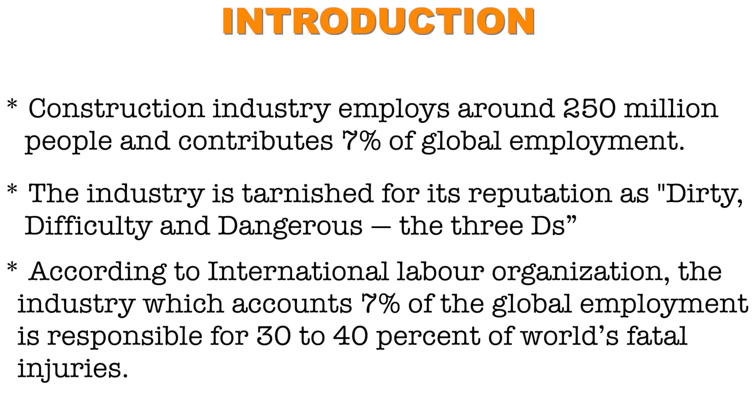The construction industry employs around 250 million people and contributes 7% of global employment. The industry is tarnished by its reputation as dirty, difficult and dangerous, the 3 Ds. According to the International Labour Organization, the industry, which accounts for 7% of global employment, is responsible for 30 to 40% of the world's fatal injuries.

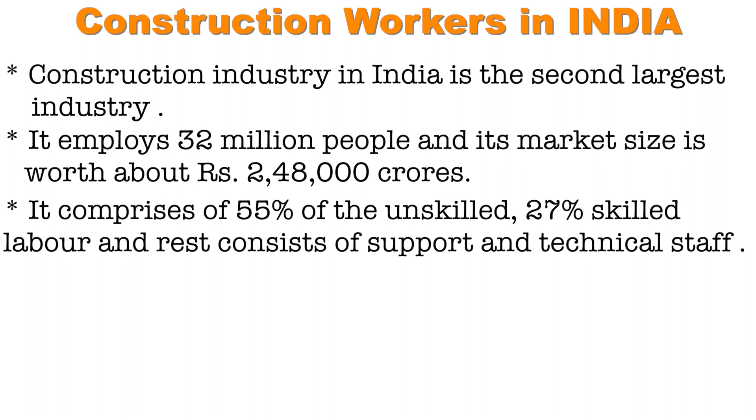Let us discuss construction workers in India. The construction industry in India is the second largest industry. It employs 32 million people and its market size is worth about rupees 2,48,000 crores. It comprises 55% unskilled labor, 27% skilled labor, and the rest consists of support and technical staff. The report from ILO 2009 revealed that every year nearly 50,000 Indians die from illness or work-related accidents. On average, 165 workers per 1,000 are injured.

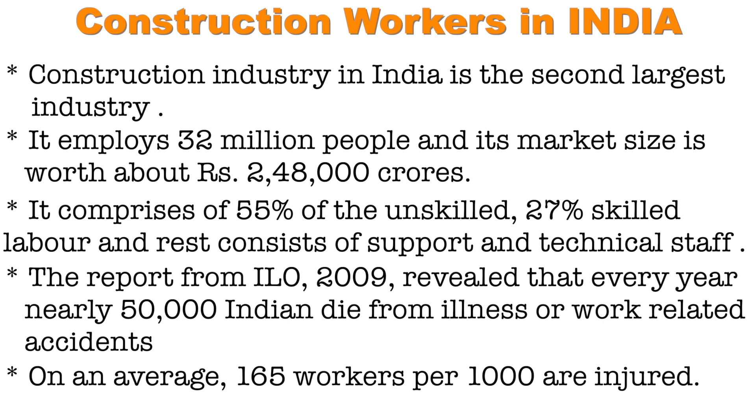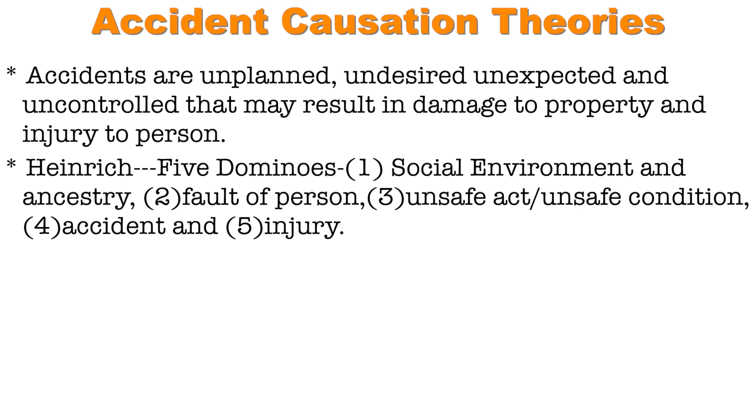Let us discuss accident causation theories. Accidents are unplanned, undesired, unexpected, and uncontrolled events that may result in damage to property and injury to persons. Heinrich's 5 dominoes: first, social environment; second, fault of person; third, unsafe act or unsafe condition; fourth, accident; and fifth, injury. Inherited traits: greed, recklessness, bad tempered, inconsiderate. Unsafe act or unsafe condition is the central factor.

Let us discuss unsafe conditions. What are the main unsafe conditions that occur in our industry? Rough, sharp or slippery work surfaces, defective equipment, overloaded tools and equipment, defective ladders and scaffolds, improper clothing, inadequate aisle space, inadequate ventilation, improper illumination, protruding ends of reinforcement and nails.

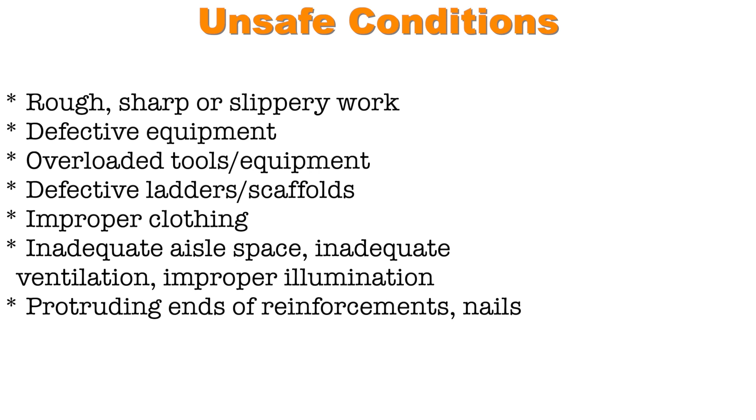Let us discuss the main points of unsafe acts. Not wearing a helmet or safety glasses, working while intoxicated, working with insufficient sleep, moving electrically energized or pressurized equipment, failure to use a safety belt, fall arrester and safety net. Using hands instead of hand tools.

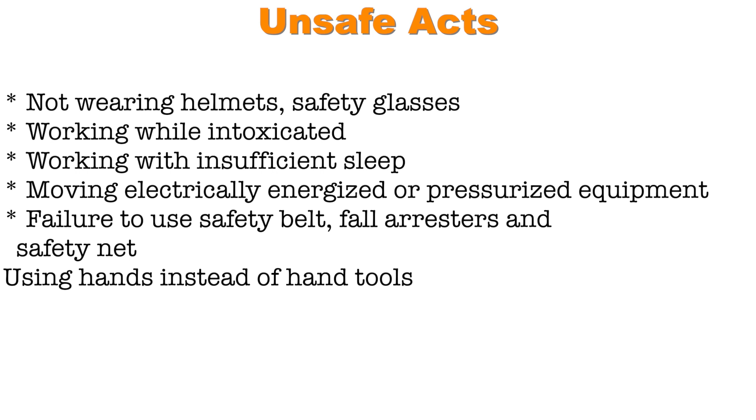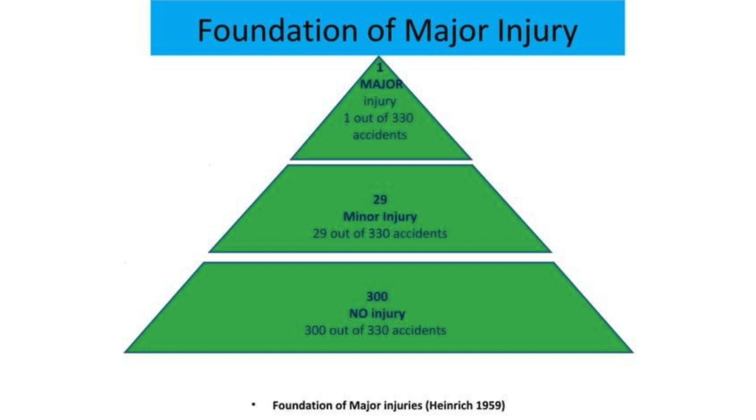Let us see the diagram. This diagram clearly shows major injury, minor injury and no injury conditions. Major injury is 1 out of 330 accidents, minor injury 29 out of 330 accidents, and no injury 300 out of 330 accidents. Look at another diagram.

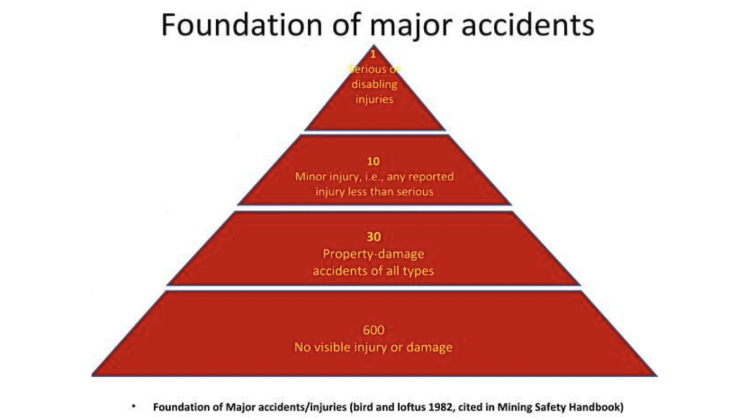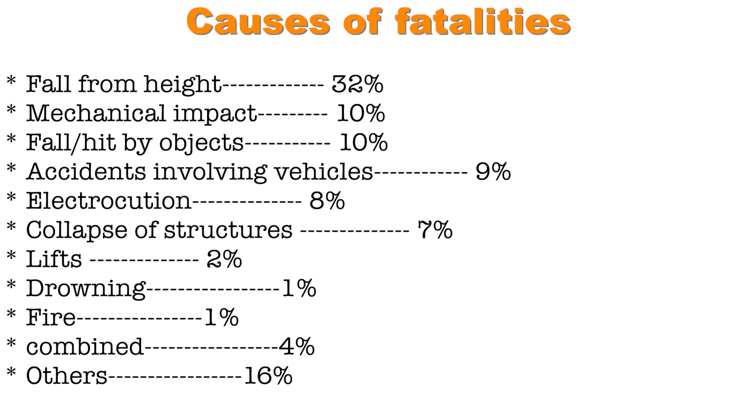Let us discuss implementing safety measures at construction sites. Construction is an industry filled with potential dangers. The good news is that you can minimize them by using appropriate safety measures. Here are 10 that could help you reduce accidents and keep people protected on the job. The first one is providing training before tool use or heavy equipment operation.

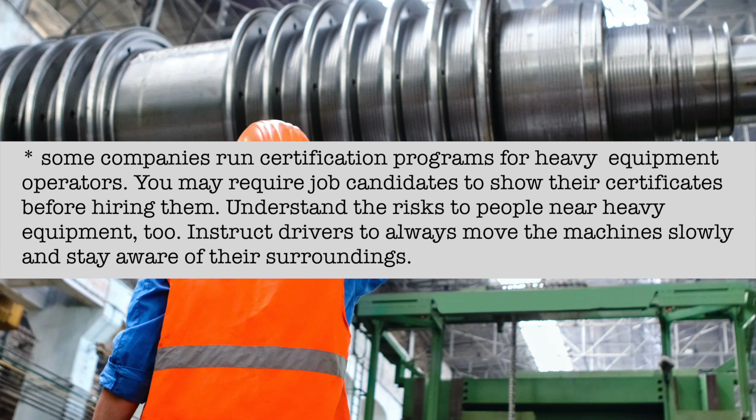Many pieces of equipment found on construction sites are especially dangerous if people don't know how to use them. Never assume that workers understand how to handle the tools and equipment provided. Give them training to ensure that they do, and update educational material so that it reflects current procedures. Some companies run certification programs for heavy equipment operation. You may require job candidates to show their certificates before hiring them.

Understand the risk to people near heavy equipment and instruct drivers to always move the machine slowly and stay aware of their surroundings. The second main point is to assess each site to identify and minimize dangers. All construction sites have risks, but they are not universal across locations. For example, someone working at height faces different threats than someone working with electricity. Take the time to evaluate each site and look for all dangerous areas. Determine the best way to minimize risk.

That may mean investing in new fall protection or installing railings to help people walk safely across slippery surfaces. Checking out each site before work begins is not sufficient. You must also monitor and limit hazards throughout a project timeline. The third main point is to require every worker to wear PPE, that is, personal protective equipment. Protective equipment for construction workers ranges from steel toe footwear to high visibility vests.

Clarify your minimum requirement for the gear a person must have before coming to work so that there are no uncertainties. Inspect protective equipment for continued proper functionality, as it may not serve its purpose if the item becomes overly worn. For example, a broken snap or strap on a hard hat could cause it to fall off if the person sustains a blow.

The fourth main point is implement practices of safe site visits. It is also wise to enforce safety measures for site visitors. Perhaps a client wants to check the progress of a new building, or a team leader at a certain company needs to see the work site before agreeing to provide service for the project. You could make every person sign in on arrival and only move around the area while accompanied by an authorized person.

Another smart thing to do is decide that all visitors must have approval before coming, as the COVID-19 pandemic makes it crucial to maintain safe distance. Virtual visit software has become popular for letting people see construction zones remotely.

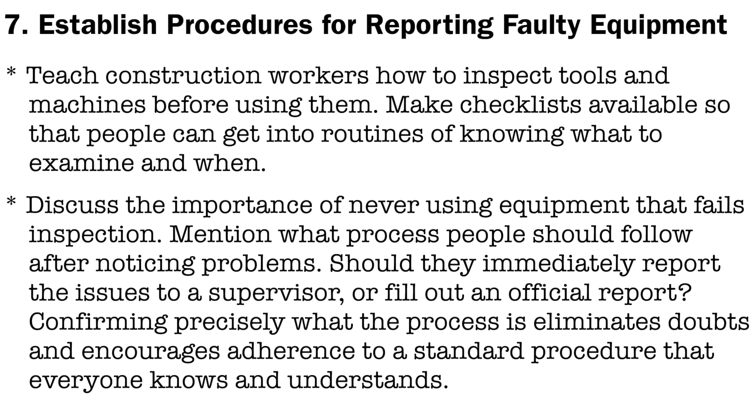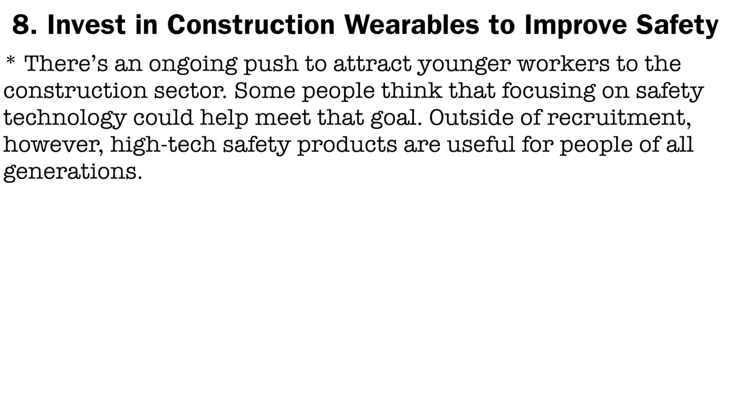Let us discuss the eighth main point. Invest in construction wearables to improve safety. There is an ongoing push to attract younger workers to the construction sector. Some people think that a focus on safety technology could help meet that goal. Outside of recruitment, however, high-tech safety products are useful for people of all generations. Products exist today that give automatic alerts when people fall, sending assistance to their location. Others measure characteristics such as a worker's heart rate and advise when they should take a break.

Companies have also developed products especially to help construction businesses manage the COVID-19 crisis. This wearable emits a sound when people stay too close to each other for a prolonged period. They also assist with contact tracing.

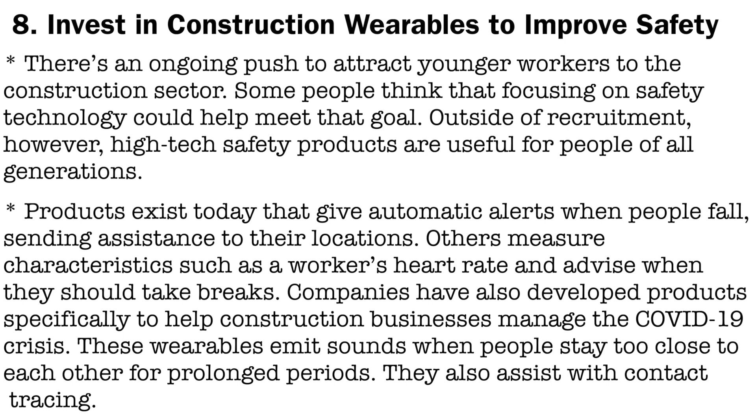Let us discuss the ninth main point. Remain mindful of weather-related hazards. Since many construction workers stay outside for their whole shift, they are at elevated risk of weather dangers. Always take seasonal considerations into account for any project and determine what you can do to promote safety. People working in hot temperatures are more likely to become dehydrated, especially as they lose fluid due to sweating. Schedule water breaks and think about how accessories such as cold packs worn around the neck and head could help beat the heat. Winter brings concerns too, so remind workers to wear layers and shift work hours to occur in the warmest part of the day when possible.

And the last main point is establish a strong safety culture. You don't want potential or current workers to get the impression that you only care about safety if regulatory authorities threaten to issue fines for non-compliance. Use your words and actions to demonstrate that staying safe is an ongoing priority. Make it so that people quickly associate excellent safety measures with your company.

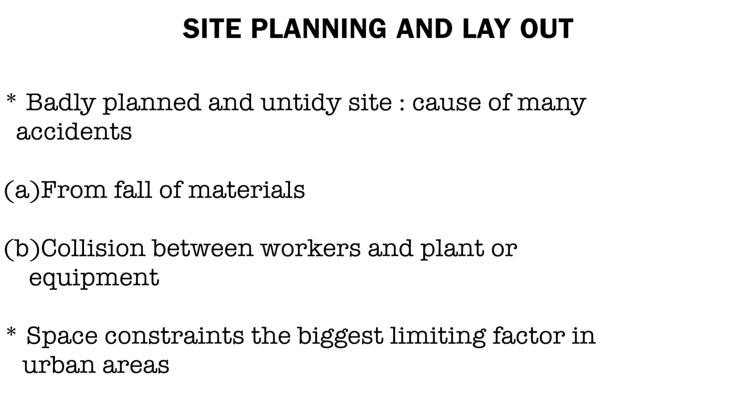Let us discuss site planning and layout. Badly planned and untidy site cause many accidents, like falling material and collisions between workers and plant or equipment. Space constraints are the biggest limiting factor in an urban area.

Let us discuss planning before work begins. The first main point is the sequence in which work is to be done. The second one is to note the hazardous operations and processes, and access for workers on and around the site. The next point, routes free from obstruction, falling material and equipment. The next point, suitable warning notices to be posted. And the next, routes to the welfare facilities to be clear and marked.

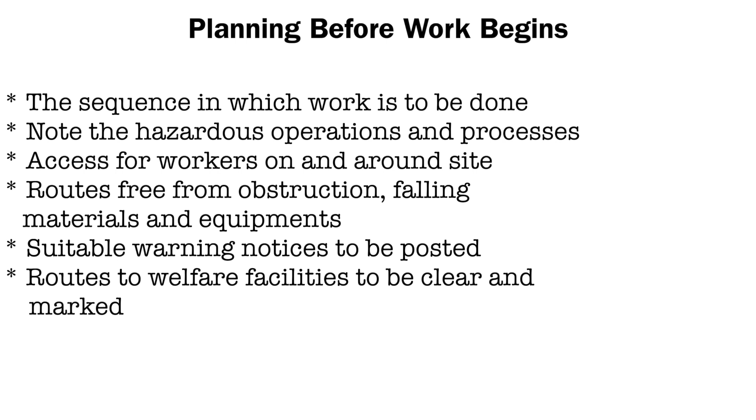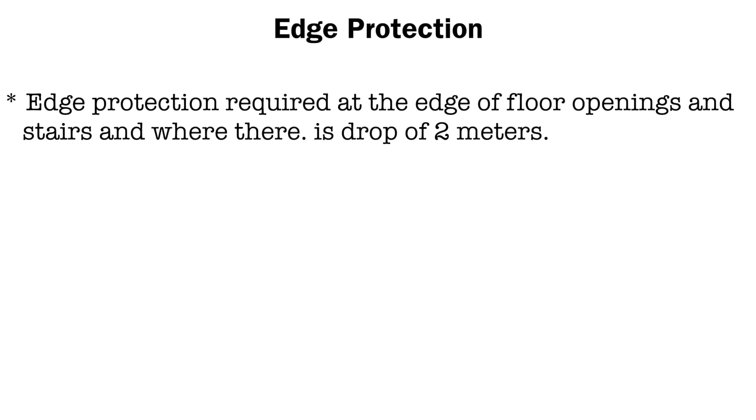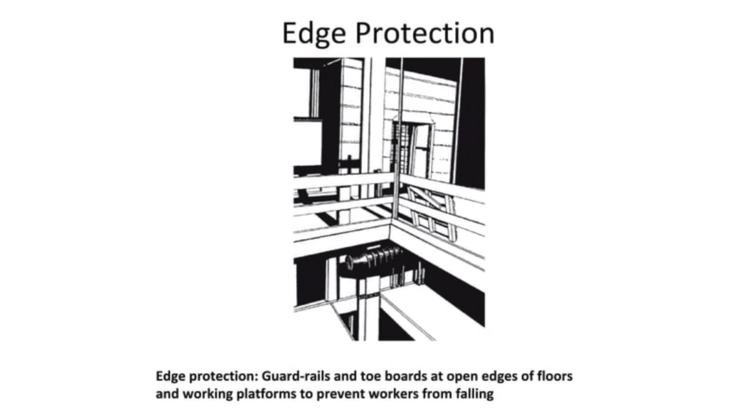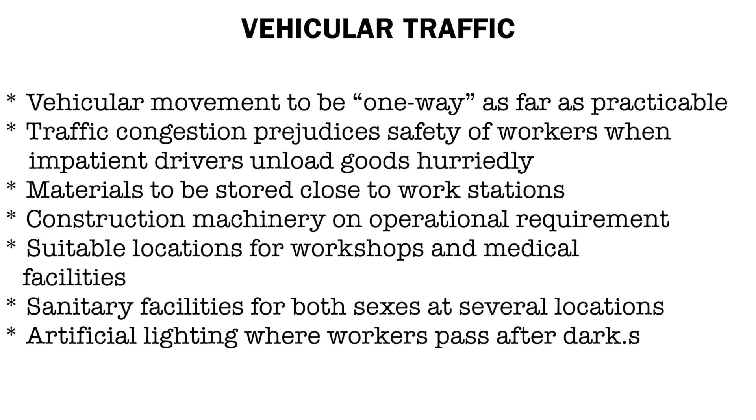Let us discuss vehicular traffic. Vehicular movement to be one way as far as practicable. Traffic congestion affects the safety of workers when impatient drivers unload goods hurriedly. The next main point is material to be stored close to the workstation, construction machinery based on operational requirements, suitable locations for workshop and medical facilities, sanitary facilities for both sexes at several locations, and artificial lighting where workers pass after dark.

Site security is also important on a construction site. The site is to be fenced to keep out unauthorized persons and protect children and the public from site hazards. Fencing to be 2 meters high without gaps and holes. Overhead protection to the public is necessary if tower crane loads pass over public thoroughfares. Low voltage electric power for temporary lighting.

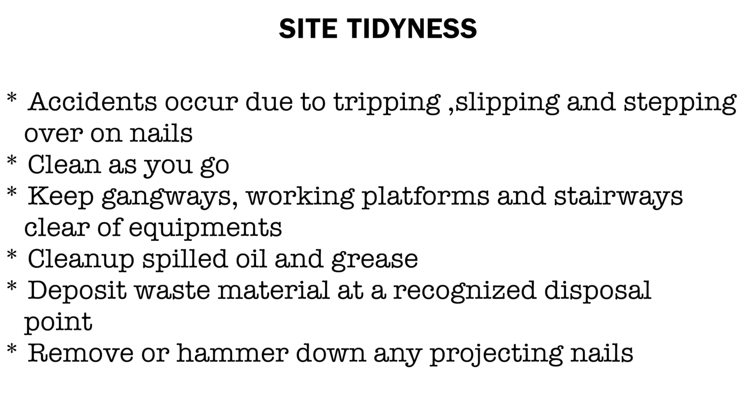Another main point is site tidiness. Accidents occur due to tripping, slipping and stepping on nails. Clean as you go. Keep gangways, working platforms and stairways clear of equipment. Clean up spilled oil and grease. Deposit waste material at recognized disposal points. And the last point, remove or hammer down any projecting nails.

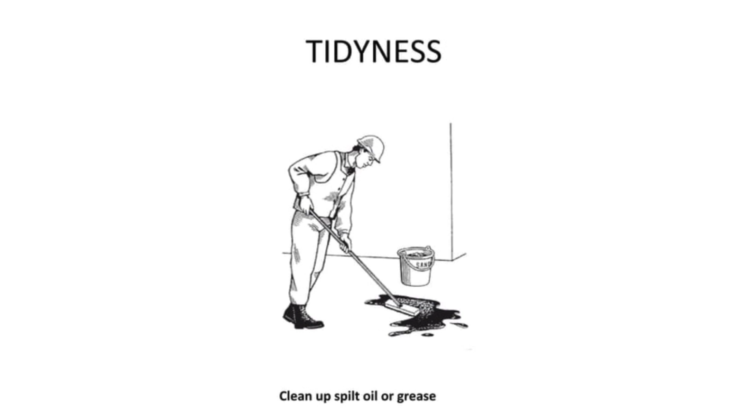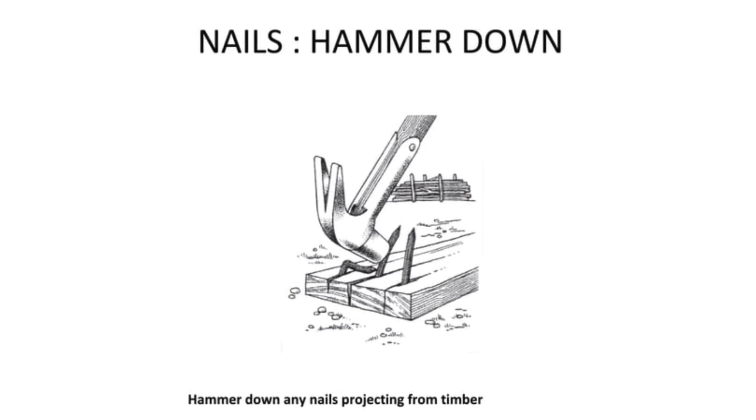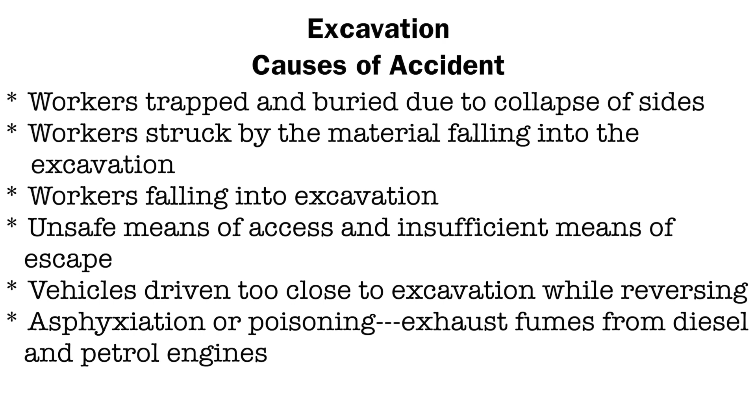Let us discuss excavation causes of accidents. Workers trapped and buried due to collapse of sides. Workers struck by material falling into the excavation. Workers falling into the excavation. Unsafe means of access and insufficient means of escape. Vehicles driven too close to the excavation while reversing. And the last point, exhaust fumes from diesel and petrol engines. These are poisonous gases.

Let us discuss preventing collapse of excavations. Sides of the excavation to be sloped to a safe angle of repose, usually 45°. Excavations 1.2 meters or more to be provided with adequate timbering and shoring. Close boarding or sheeting is required if the ground is unstable or lacks cohesion. Never work ahead of the trench support. Erect suitable barriers to prevent falls into the trench.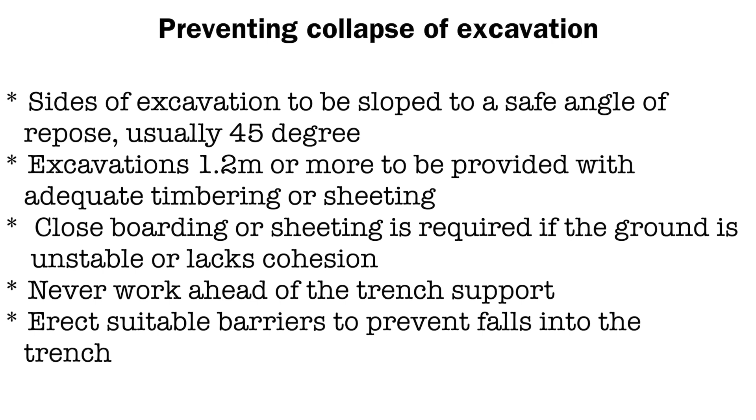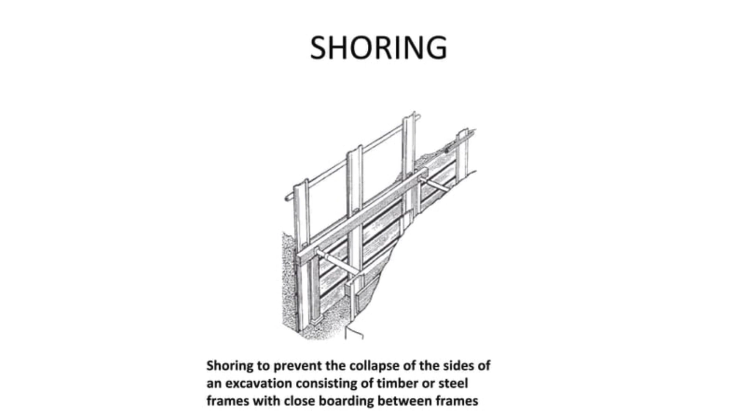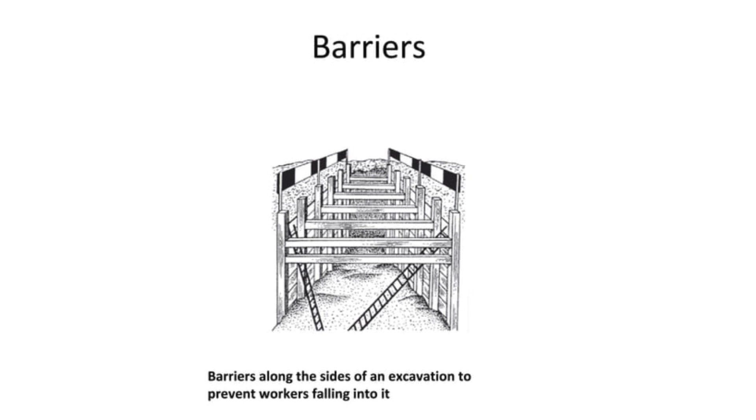Look at the diagram of shoring. Shoring prevents the collapse of the sides of an excavation, consisting of timber or steel frames with close boarding between the frames. Look at another diagram. This is a barrier diagram. It shows the importance of barriers along the sides of an excavation to prevent workers falling into it.

Let us discuss an important point, that is inspection. Inspection by a competent person before work begins, and at least once a day when work is in progress. Thoroughly examine once a week. Keep records of such inspections.